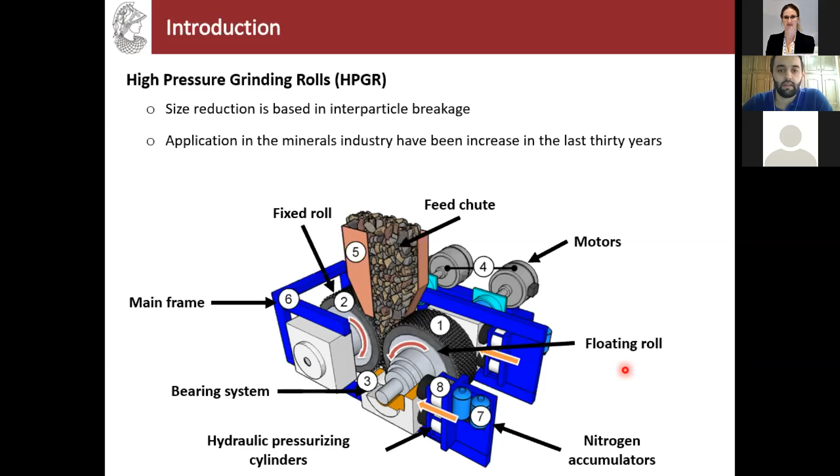For instance, the HPGR has high throughput, allows lower specific energy consumption, and also a high reduction ratio. Therefore, in the last 3 decades, applications of the HPGR in the minerals industry have grown. Among these different applications, one that started in the middle of the 1990s was the incorporation of the HPGR inside pelletizing plants.

Here in Brazil, the company Vale was one of the pioneers applying the HPGR inside an important step within the iron ore pelletizing process - what they call the pellet feed preparation step. This step is quite important in pelletizing plants to improve the specific surface area of the iron ore concentrate, thus providing a more qualified product to the downstream operation. The HPGR can operate in an integrated circuit with ball milling, being applied even in the pre-grinding and also in the regrinding pre-pelletizing process.

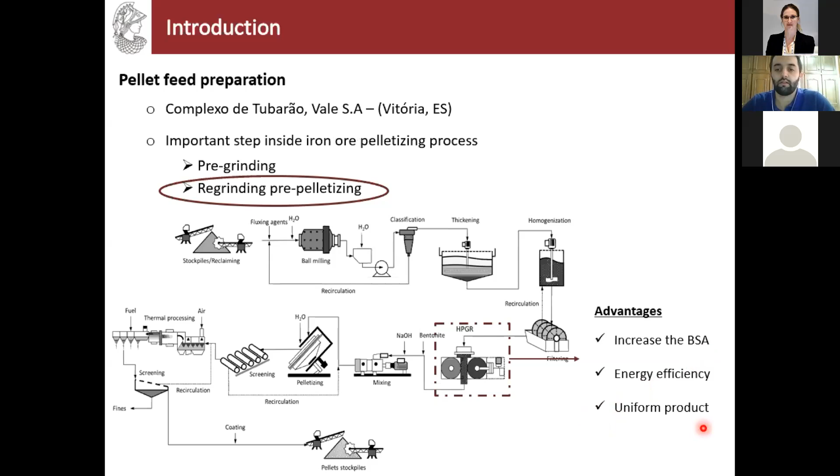The application of the HPGR here has some advantages—for instance, improvement in the BSA, the specific surface area of the iron ore concentrate, in a process with high energy efficiency, also producing a very uniform product. Taking into account all of these advantages, in the last 3 years, in a great partnership with the company Vale, we have tried to understand and study the HPGR iron ore pellet feed from different points of view.

We've tried to understand how different operating conditions can change the HPGR performance, also how the particle breakage behavior for different iron ore concentrates used to feed the HPGR can change the size reduction, and of course trying to apply HPGR mathematical modeling to describe the HPGR performance from variations in the feed characteristics and also in the operating conditions.

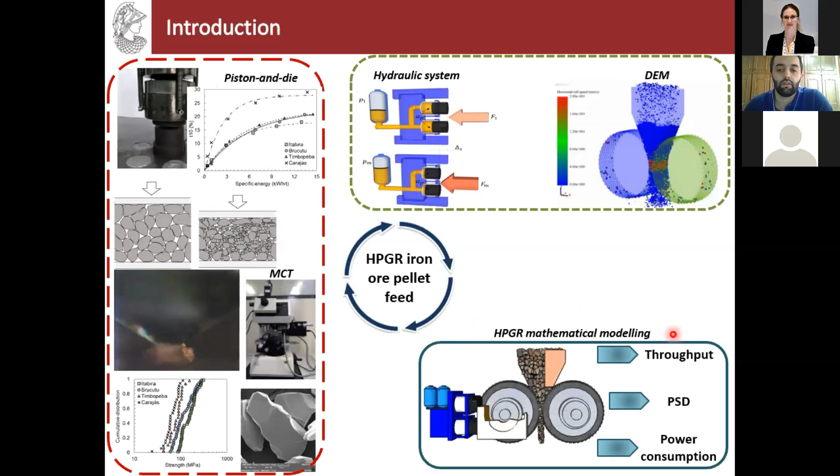Today I'm going to talk about the work we carried out regarding the application of HPGR mathematical modeling for pressing iron ore concentrates.

Among different models already proposed in the literature, these three presented here can be stated as the most popular models available. Basically these three phenomenological approaches rely on the correlation between the material variables, the feed characteristics, or key variables, the operating conditions, and also the machine settings, to predict the HPGR performance from three different performance variables: the throughput, the power consumption, and also the product size distribution.

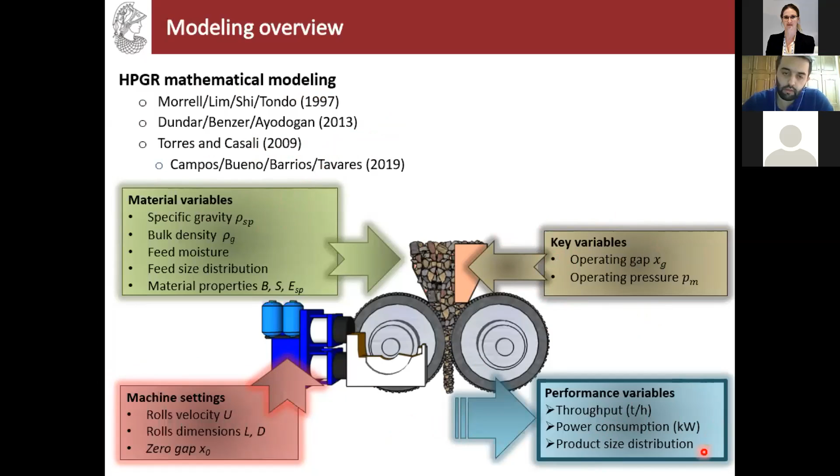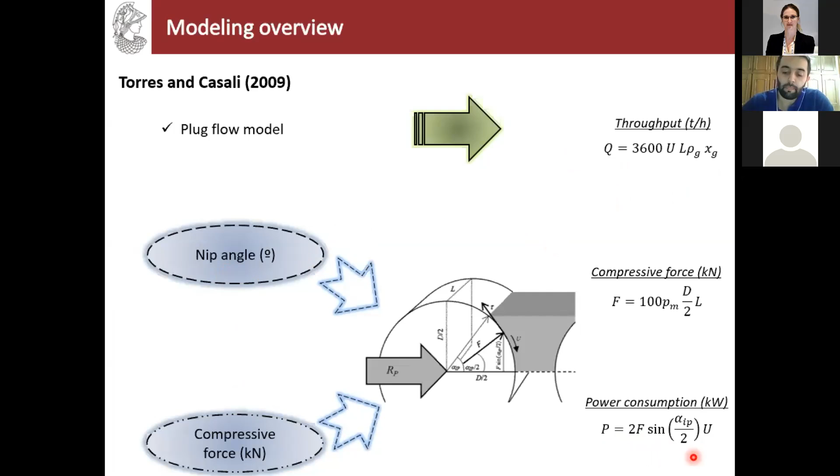Among these three models, the one proposed in 2009 by Torres and Casali relies on the plug flow model to describe the throughput using this equation presented above, and also relies on a correlation between the calculated nip angle and the compressive force applied to the particle bed to describe the power consumption using the equation presented below. Finally, the particle breakage model proposed by Torres and Casali relies on a description based on the population balance model to describe the size reduction.

Here the authors proposed to divide the roll into different sections along the axial position, thus proposing a parabolic power profile along the roll length. This parabolic power profile can be defined by this equation presented here, thus providing us different breakage rates along the roll length.

Among all the models already used and available in the literature, the Torres and Casali model is the only one that allowed describing the size reduction at different positions along the roll length, thus providing us a finer product size distribution at the central region and also a coarser product size distribution at the edge region.

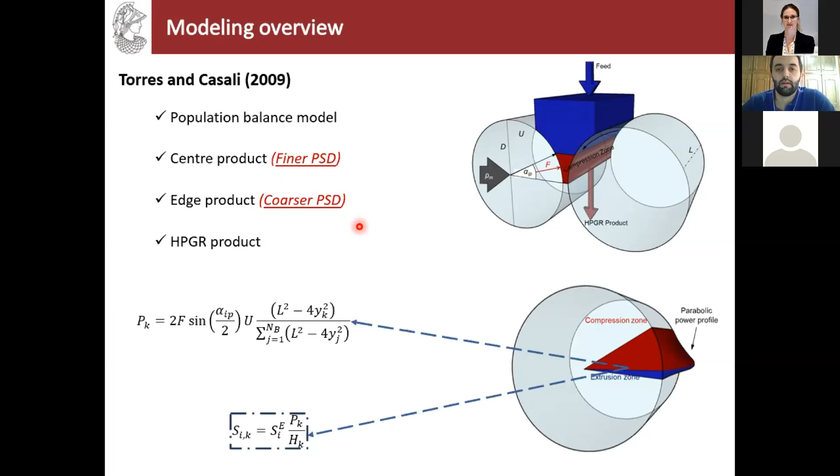However, even though the Torres and Casali model has been used by different authors for copper ore operation and also applied as a model predictive control, there are some limitations and challenges regarding its application for pressing iron ore concentrates, as you can see here.

We have seen that the feed material ejected by the edge of the roll and the material acceleration in the compression zone are two challenges not accounted for by the throughput model. Indeed, these limitations compromise the prediction of this performance variable.

The comparison between experimental and calculated values has shown that the model underestimates the experimental measurements for both pilot scale and some industrial scale HPGRs, in a wide operating range. So indeed, this model is not a very good tool to describe the throughput for pressing iron ore concentrates.

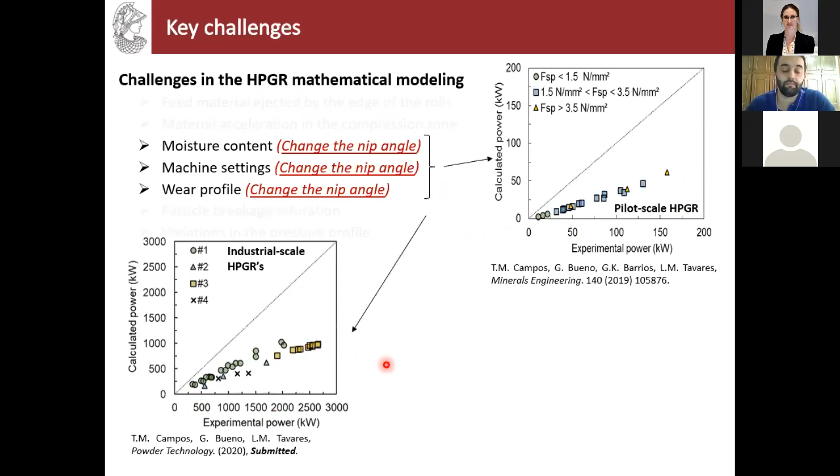Finally, the limitations for the particle breakage model. The first one is the most important limitation for different HPGR models, and here it's important to bear in mind that there is no model in the literature that allows describing the particle breakage saturation effect.

The Torres and Casali model indeed overestimates the size reduction for iron ore concentrates when the HPGR is operating with high compressive force—in other words, high specific energy consumption. There is an additional limitation for the Torres and Casali model regarding the variation in the pressure profile.

As you can see, the Torres and Casali model relies on a constant shape profile, a parabolic profile, this red line presented here. But for industrial scale HPGRs, we have seen that a more trapezoidal profile is the more proper description along the actual position instead of a parabolic profile, highlighting that this model has some limitations to describe the particle breakage behavior for pressing iron ore concentrates.

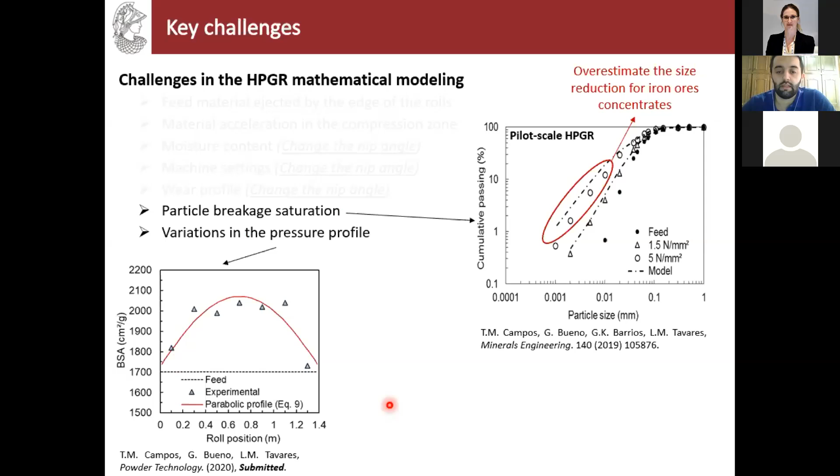Taking into account all of these limitations, in the last 3 years we tried to improve the model prediction, basically using the main structure already proposed by the Torres and Casali model, but including some modifications that we have tried to use.

The first one, regarding the throughput model, this equation should be able to calculate the feed material ejected by the edge of the roll, the proportion of material that will be ejected by the edge of the roll, as you can see in the figure, according to different operating conditions.

The second modification relies on the proper description of the material acceleration in the compression zone. This equation should be able to calculate the material speed according to some variations in the operating conditions.

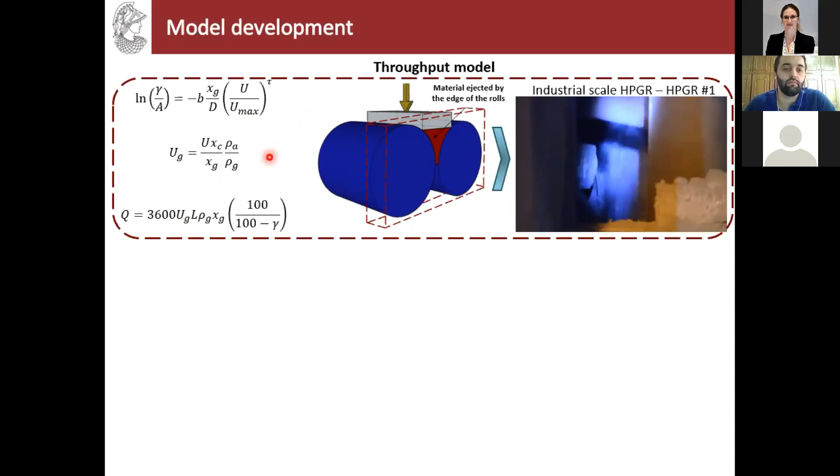And the last modification, applying the new equation for the plug flow model, but here accounting for the two modifications that we proposed. For the power consumption model, we also proposed some modifications, just a single fitting parameter in order to increase the calculated NIP angle.

This is trying to account for the different challenges that I presented before, and also trying to provide a more reliable description for the power consumption.

And the last modifications proposed for the particle breakage model involve 3 main modifications. The first one relies on the incorporation of the normalized breakage function in order to describe the particle breakage behavior for Brazilian iron ores, in order to control the ultrafine particle generation.

The second one relies on the incorporation of the breakage saturation effect, trying to apply this efficiency term here that will be able to change according to the application of the specific energy.

And finally, a more general equation that should be able to describe the actual roll profile. This equation is based on the Fourier transform, and this single fitting parameter presented here should be able to change the shape profile from a more parabolic profile to a more trapezoidal profile.

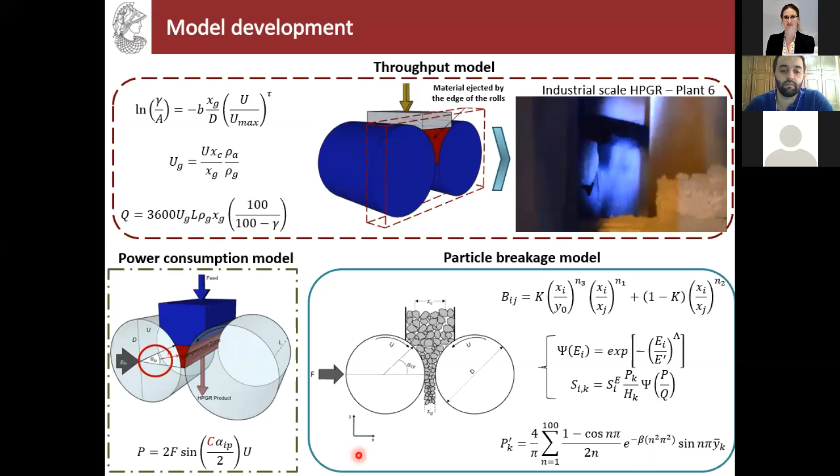Taking into account all of the advantages and modifications that we presented for this model, we tried to validate the model at different scales of operation.

Here, first, the comparison between experimental and calculated values for the throughput in some industrial scale HPGRs. As you can see, a very good agreement between experimental and calculated values for different equipment in a wide operating range, highlighting that we have here a very good model with great fidelity to describe this performance variable in industrial scale operations.

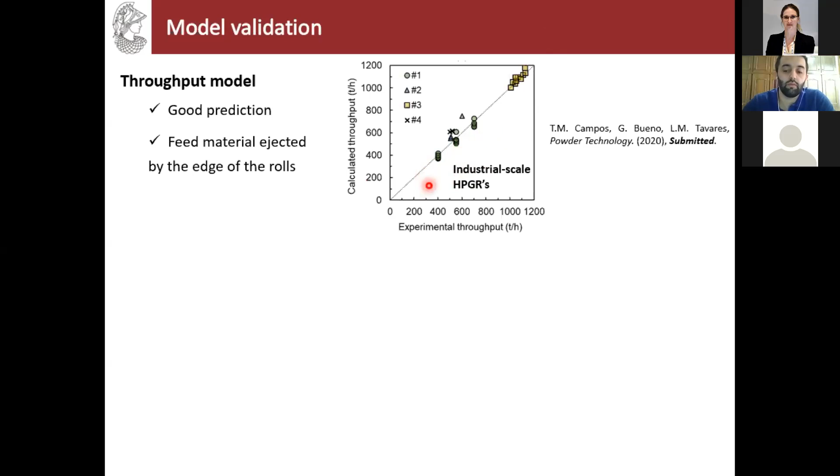We also validated this model for a pilot scale HPGR in a wide operating range here, highlighting that the model indeed has a very good agreement between experimental and calculated measurements.

And also for a lab scale HPGR, a very good description for different tests that we carried out, highlighting that this model is a very good tool to describe the throughput at different scales of operation, accounting for the modifications that we proposed.

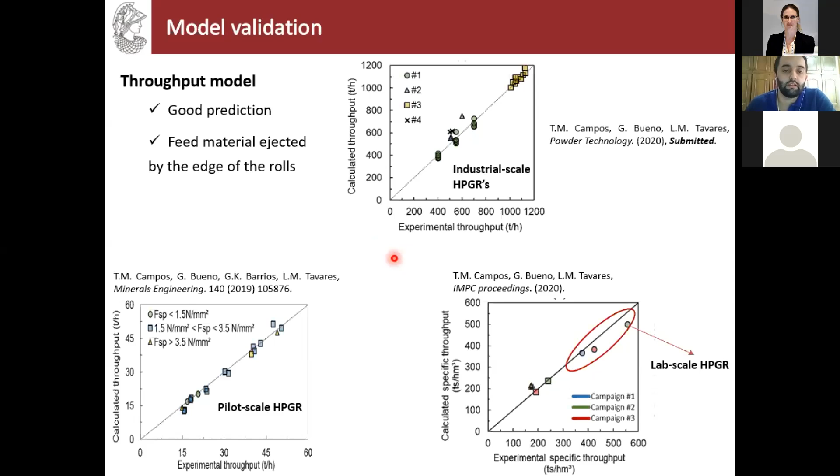For the power consumption model, we also validated the model, here for a wide operating range for different equipment in industrial scale HPGR. Once again, we have shown that the model is indeed a very good tool to describe the power consumption.

Here it is important to bear in mind that just a single fitting parameter was quite important to improve the model prediction. So in an industrial scale HPGR, a very good agreement.

Also in the pilot scale HPGR, for a wide operating range, a very good agreement for calculating the experimental values. And finally for a lab scale HPGR.

Once again, the single fitting parameter used was quite important to improve the model prediction, highlighting the very good agreement between experimental and calculated values for different scales of operation.

It is important to bear in mind that the fitted parameter for each HPGR used was very close to each other, despite using different equipment to estimate the parameter.

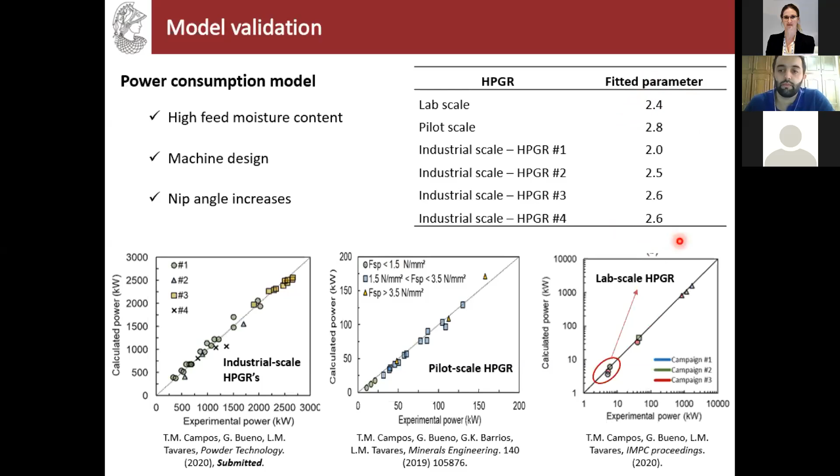For the particle breakage model, it's first important to estimate the optimal parameters that describe the particle breakage behavior. Using this base case, we compare experimental and fitted values and find very good agreement between both, highlighting the optimal parameters that describe the normalized breakage function for different top size particles.

We used a constant breakage function and fitted different selection functions, specific for different equipment in industrial scale.

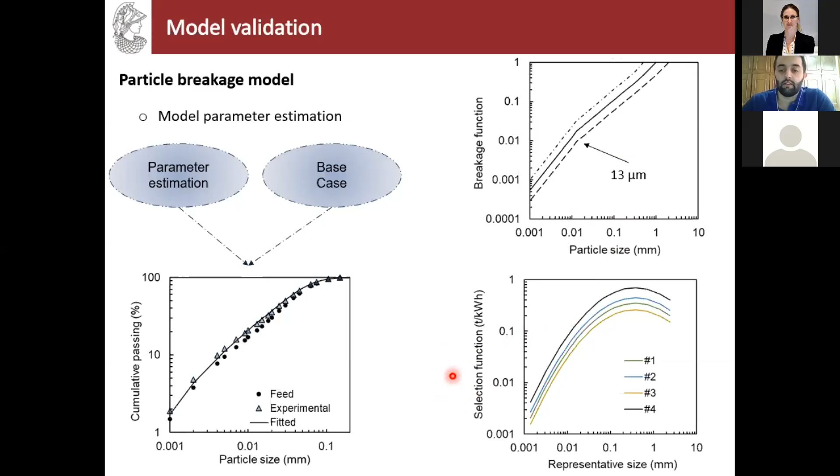First, for validation, the prediction of the product BSA for a pilot scale HPGR: the single incorporation of the non-normalized breakage function for pressing iron ore concentrates in a pilot scale HPGR was quite important to improve the model prediction.

Here on the right, the modified Torres and Casali model shows a very good description of the product BSA in a wide operating range, highlighting that we have a very good model with great fidelity to describe this operation.

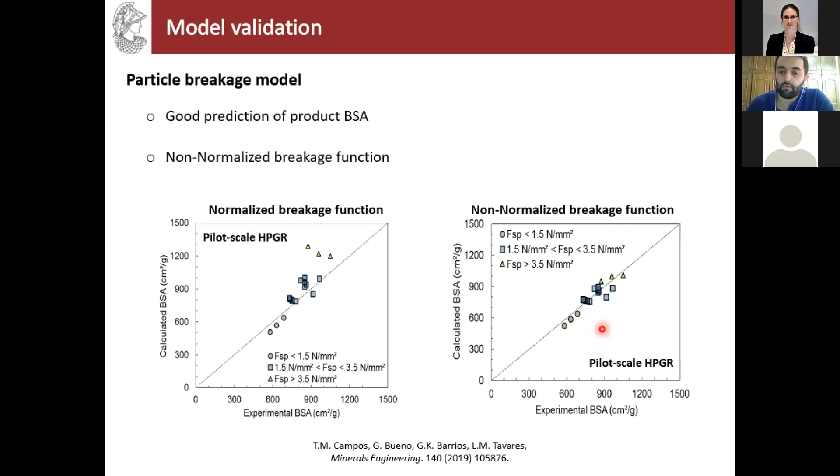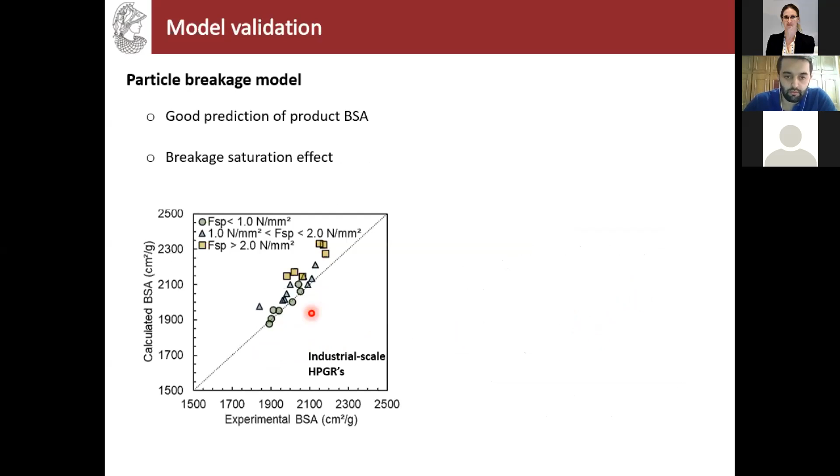For industrial scale HPGRs, the application of the modified Torres and Casali model with the non-normalized breakage function shown had great potential to describe the product BSA, but it's important to highlight this test was carried out with high specific compressive forces.

Indeed, the Torres and Casali model does not provide a very good description, since it lacks proper description of the breakage saturation effect. Accounting for the modifications we proposed, once again the comparison between calculated and experimental values shows a more proper description of the size reduction.

This highlights a wide operating range for different equipment, with very good agreement between experimental and calculated values, showing that we have here a very good model with great fidelity to describe this size reduction for industrial scale HPGRs.

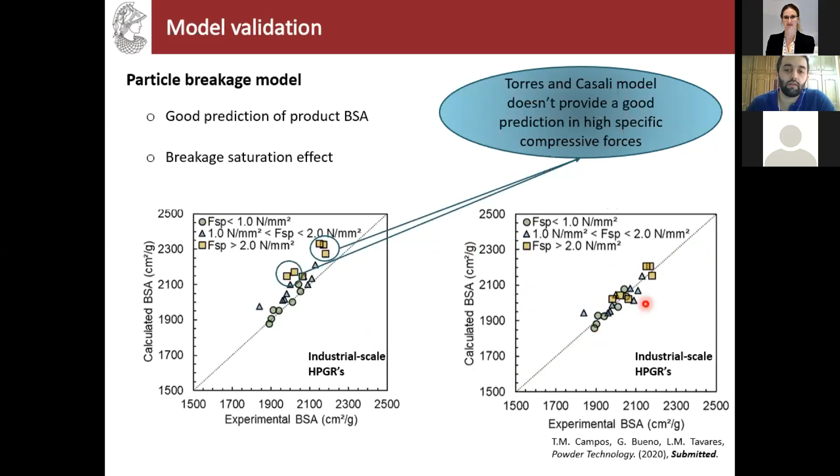The modified Torres and Casali model was also validated to predict different shape profiles along the axial position. This equation, with our modification, presents a single fitting parameter that should be able to change the shape profile from a more parabolic profile to a more trapezoidal profile.

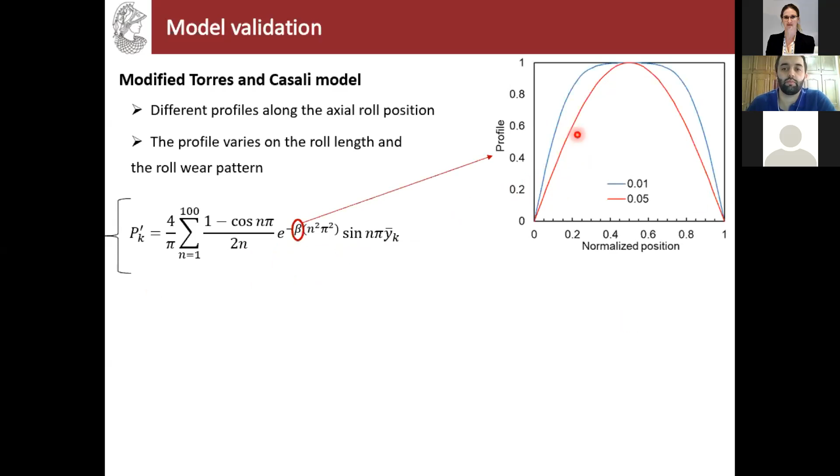So indeed, after all the model validation, we have here a very good, robust and practical model that can be used to describe the pressing of iron ore concentrate for different scales of operation.

Now, to present some results regarding industrial case studies, I will present two case studies. The first one concerns the application for a pelletizing plant from Vale.

The HPGR equipment used by the company Vale is quite impressive, with high roll dimensions. There is a great problem in the operation: the feeder does not ensure a choke fed condition during grinding, and therefore the real throughput of the HPGR is lower than the projected throughput.

So we proposed to the Vale team to apply a different circuit configuration: a single stage pressing with recycle, applying product edge recycle, improving the mass of material inside the HPGR, and maybe providing a more qualified product at the end of the operation.

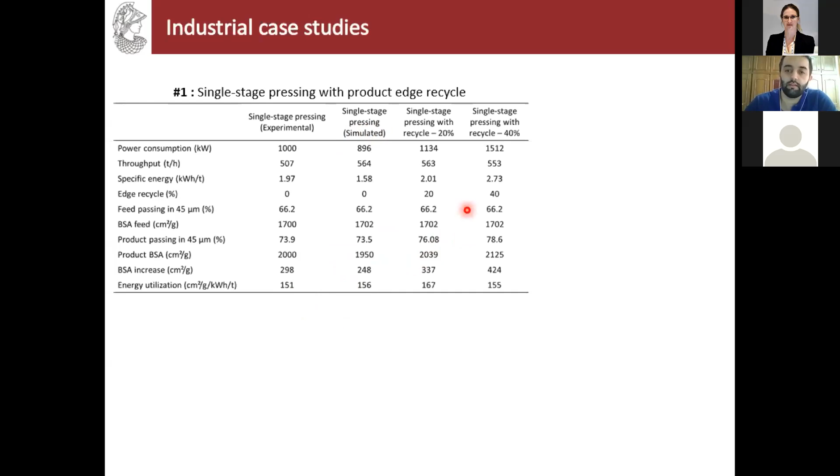Here, presenting the different scenarios we simulated, I will highlight the single stage pressing with 40% of product edge recycle.

It's important to highlight that the circuit throughput was kept constant, but the specific energy was a little bit higher than the traditional single stage pressing operation.

But most importantly, the product BSA we achieved was around 424 centimeters square per gram, an increase from the feed in comparison to the single stage pressing's 248 centimeters square per gram.

So indeed, we have here a very good circuit configuration that allows us to improve the Blaine specific surface area of the product, improve the qualification of the final product, and also increase the mass of material processed by the HPGR.

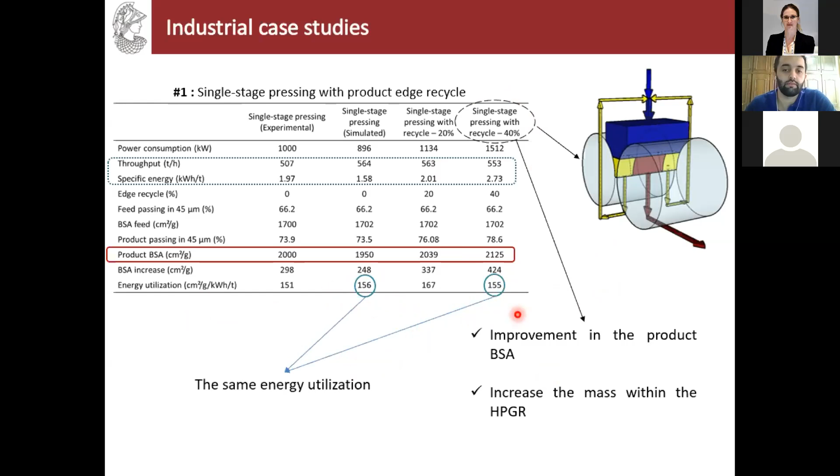It's also important to highlight that the energy utilization used by both equipment configurations was the same, regarding the single stage pressing and the single stage pressing with recycle, highlighting that there is great potential to apply the circuit configuration using product edge recycle for pressing iron ore concentrates.

The second case study relies on the application of the model as a pseudo-dynamic model.

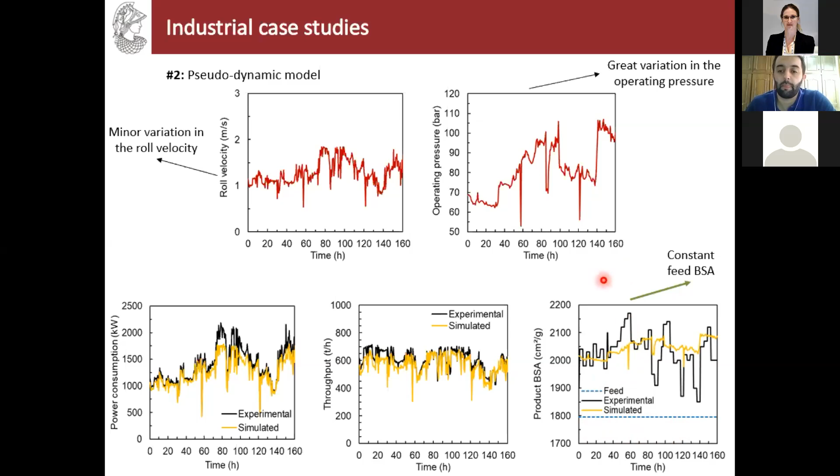So the conclusions of my work: indeed, the modifications that we proposed were quite important to improve the throughput and power consumption prediction, and also the particle breakage model was validated in a wide operating range.

The new equation was important to improve the description of the power profile, and also the model was applied using two industrial case studies, highlighting that the model can be used to simulate different circuit configurations and improve operation, and also to be applied as a pseudo-dynamic model, maybe to improve the digitalization of the operation.

And here the model shows great potential to describe some industrial scale HPGR operation, and also some pilot scale and lab scale HPGR operation for pressing iron ore concentrates.

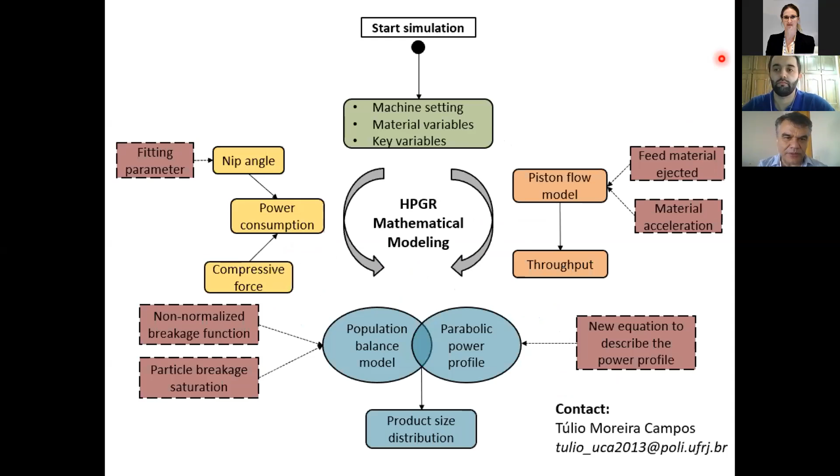Just out of curiosity, in the first case study you showed a picture of an HPGR by ThyssenKrupp. A lot of you may know this was the first attempt to use the HPGR in the hard rock minerals industry. That's exactly the same machine that was tried in 1995 in Cyprus Sierrita in Arizona, US, which was not a successful application of the HPGR at the time. This HPGR was pretty much decommissioned from that site, and then Vale ended up buying it, and until today it's pressing iron ore fines, just out of curiosity.

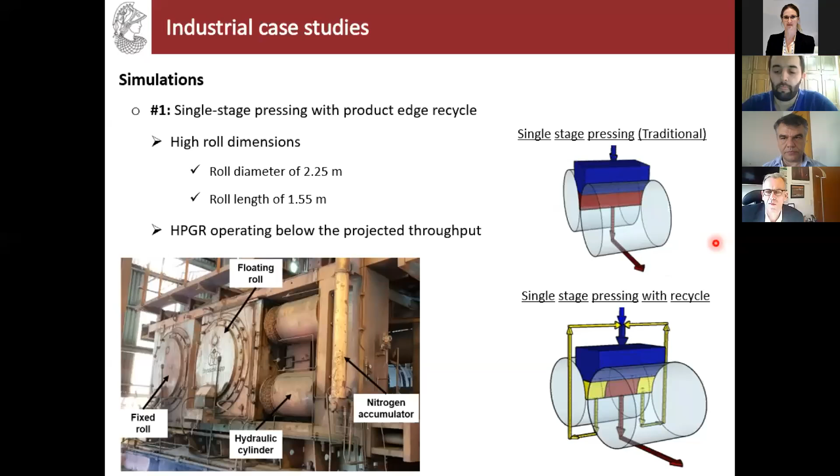Okay, I'm sorry, Professor, could you please just repeat the question? I think there's a problem with the audio here. Maybe more briefly, Tulio, what is your opinion about different alternatives to cheek plates, like flanges and things like that, and how could the model cope with that?

Yes, indeed, cheek plates and flanged rolls are the two main technologies used as side seals for the HPGR. I imagine the flanged rolls could provide a more homogeneous pressure profile along the axial roll position. Cheek plates are a very good side seal, but there is indeed a great distinction between the pressure in the central region and in the edge region.

And I imagine that the flanged rolls can provide a more homogeneous pressure profile along the axial position. There are some other features in the HPGR operation, such as moisture content. We have seen that in a pilot scale HPGR, the feed moisture can also improve the pressure profile, providing a more homogeneous pressure profile along the roll length instead of this edge effect presented here.

Yeah, just complementing, a colleague of Tulio's is actually doing work simulating in DEM in order to capture this profile. So we're using DEM to capture the power or pressure profile, which, as Tulio mentioned, is very much affected by the type of containment system that you have. Indeed, that's something on the way. Maybe next year, hopefully, we'll have an update on that.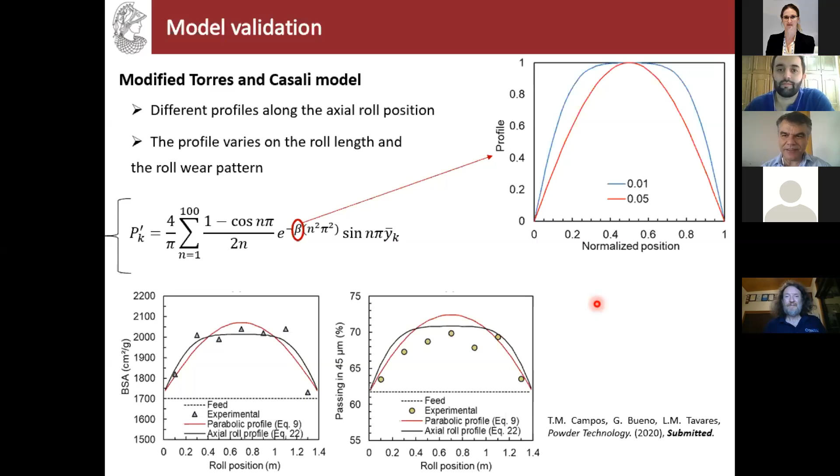Shujaat demonstrated early determination by taking two years to get himself from applying to join a PhD with me to eventually getting through the door. It was at least two years through the university and Australian system. He's from Pakistan. He won the gold medal for his degree in mineral processing over the four years, and then he was awarded an EMerald Scholarship to go and study a master's in geosciences at University of Liège, Nancy, Luleå. He also went to Freiberg, I wasn't sure if that was part of the degree, but across four universities. So he really got a good view of the European university scene before coming to join me and get promoted to making small rocks even smaller in a most precise manner, which he can share with you tonight. So Shujaat, over to you.

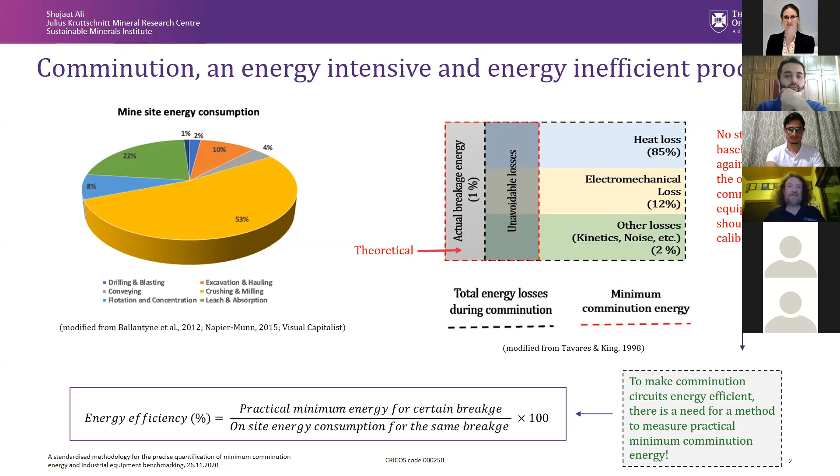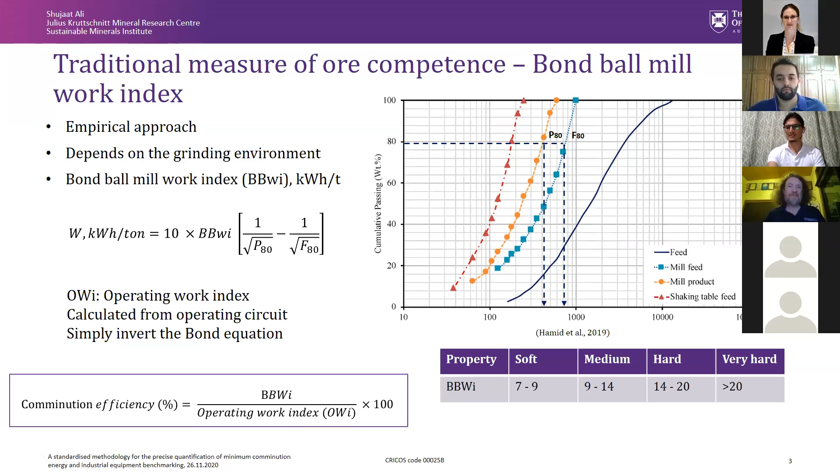If not, then it will give you misleading results. Considering that, Professor Malcolm Powell here at JKMRC coined the term size specific energy, which he defines as the energy consumed to generate a material below a marker size, such as 75 micron.

It is considered a more consistent hardness index as opposed to other indices such as bond work index, and after all, it is independent of grinding environment, unlike bond work index.

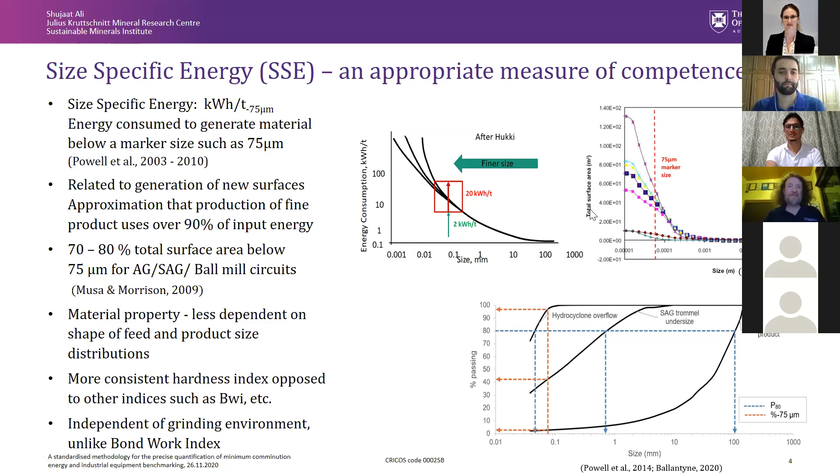We have a lot of breakage tests today. They are classified as either bankable tests, geometallurgical tests, or proxy tests. If they're bankable, they could be like bond test, JK drop weight test, SMC test, similarly geomet test. I will not go into detail of these tests.

However, I would highlight that they could be either bulk grindability tests or single particle breakage tests. Bulk grindability tests are not really well appreciated for characterization, because they don't give you the right measure of the minimum practical comminution energy, due to interparticle interactions. There is also a complexity of multiple breakage modes involved, such as compression, impact, and attrition altogether, and it also depends on the grinding environment.

On the other hand, single particle breakage - a lot of studies since the 1960s until now show that it is a very accurate, or quite appropriate way, of establishing a relationship between input mechanical energy and size reduction. For instance, JK drop weight test was one of them, and also impact load cell, which has its own variants, such as SILC.

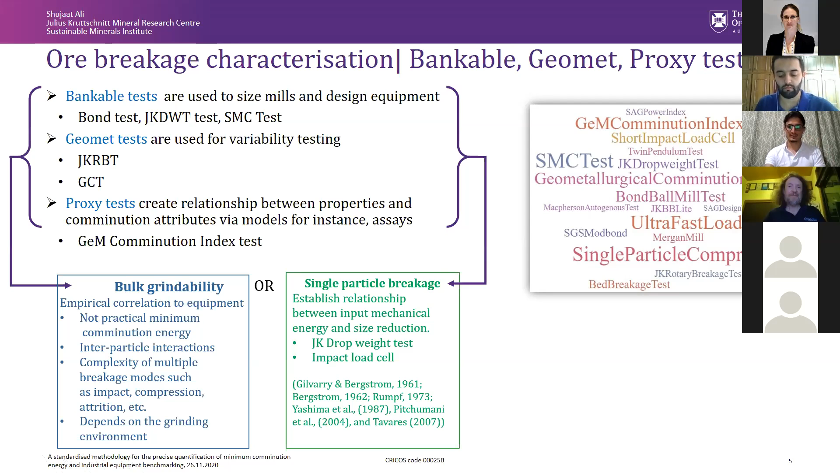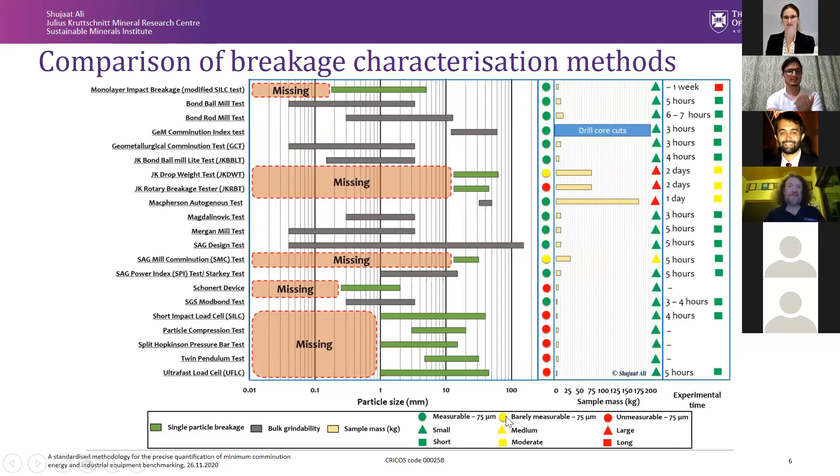So I have put together here a summary of all the different characterization techniques, which elucidates the comparison between them in terms of the particle size range where each operates, their capability to produce enough minus 75 micron material for determination of size specific energy, the initial mass required for the test, and the time of the test. I'm comparing all these techniques using a traffic light system: green means highly acceptable, red means not desirable, and yellow means acceptable or not depending on your needs.

That was just a comparative analysis. I will be more focused on single particle breakage techniques, and I will come to the first one at the end. Before that, I will start from the JK drop weight test and the JK rotary breakage tester. Let's see the particle size range where they operate.

Below around 12 millimeters, these techniques don't operate, but most of the energy is considered to be consumed in this area. So it's missing here, and there's also a lot of initial sample mass required for the test. So it's not very appropriate for either of these tests to use.

Similarly, the SAG mill test is again missing in the fine range, and the initial sample mass required isn't very small either. If we go to the Schonert device, it doesn't have the capability to produce minus 75 micron, and likewise for the short impact load cell, particle compression test, and so on—none of them produce any minus 75 micron.

However, the monolayer impact breakage test, which was basically a modified SILC test performed by a student of Grant here at JKMRC a couple of years back, seems quite promising because it went all the way down to around 180 micron. It was also able to collect a sufficient amount of minus 75 micron, as you see from the green signal, but it was very time consuming—around one week was required for that—and there are complexities involved with the experimental procedure.

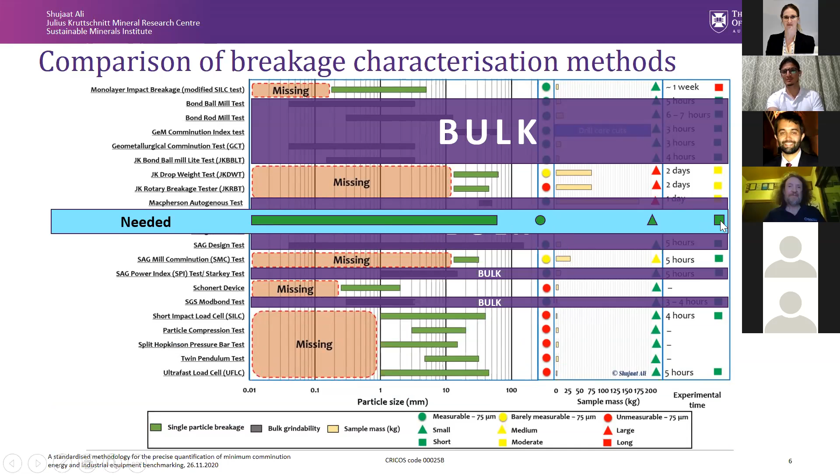So putting it all together, what we actually needed was a method that can cover a wide range of particle sizes, that could give us sufficient minus 75 micron material produced, that consumes very little mass, and that is simple and quick. That lays down my research motivation.

There's always a sort of uncertainty associated with these results, and if you extrapolate, that uncertainty will keep increasing further. So we need a technique that can give us data in this missing range. Once we know that, we'll be able to compare or calibrate our industrial or lab scale equipment with that minimum comminution energy.

So we need a single particle breakage test that can determine practical minimum comminution energy in terms of size specific energy, with testing capability at a fine size range down to 100 micrometers. If we're generating this data, we need to grind very fine, down to 100 micron, and calibrate on-site comminution equipment.

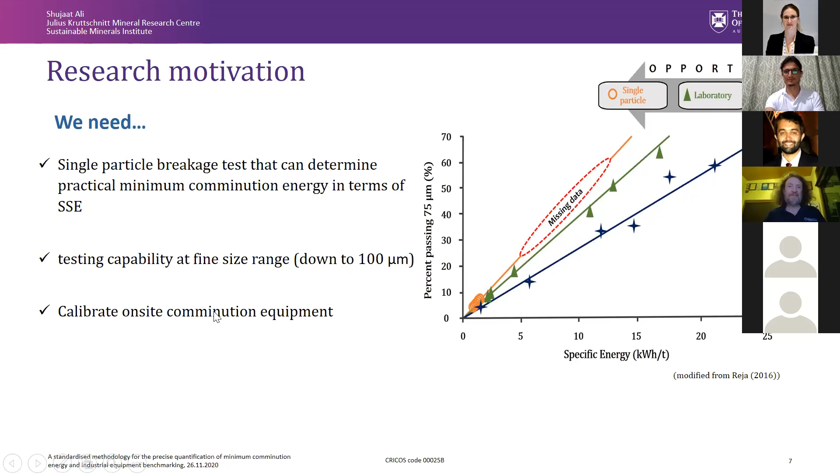Secondly, size-specific energy determined through particle monolayer breakage can be used as a reliable measure of minimum achievable comminution energy. And third, a precision rolls crusher can be used as a practical characterization device to accurately measure the minimum achievable comminution energy across a wide range of initial particle sizes using particle monolayer breakage.

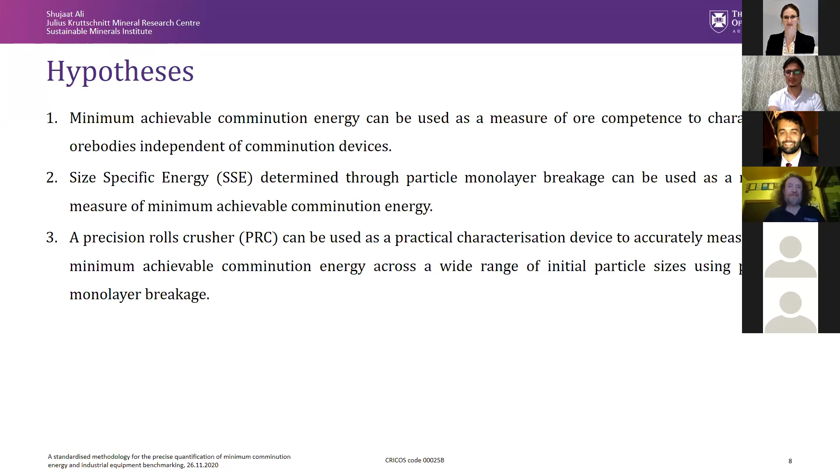The objectives of my thesis are to measure size-specific energy up to 80% passing minus 75 micrometer.

The second objective is to validate the precision rolls crusher size-specific energy results. How will we validate that? By testing the same samples other researchers used for monolayer impact breakage and single particle breakage tests, such as Reja, the grad student, and Fatma Saeidi. They already have their samples here with us, and we will compare our results with theirs.

Third, compare measured size-specific energy to that calculated from high quality production plant surveys. These are basically the survey data, and we have samples from the surveys, so the results made using the rolls crusher will be compared with them afterward.

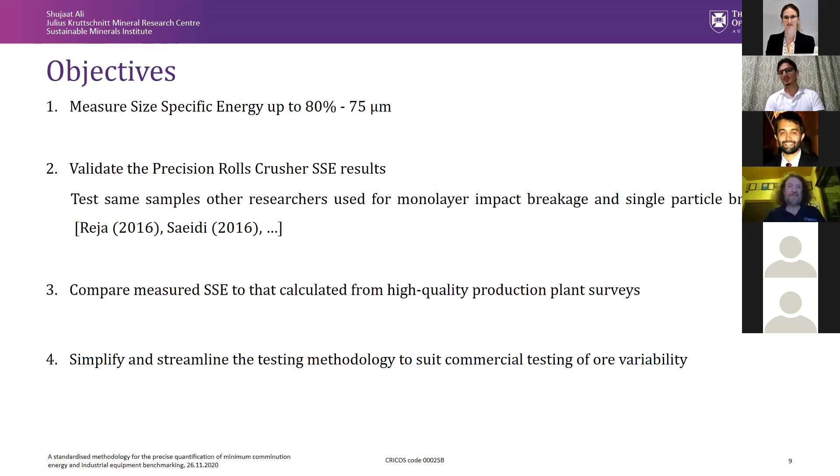And fourth, simplify and streamline the testing methodology to suit commercial testing of ore variability. So the last step of the thesis would be to simplify the methodology so that it is well suited for commercial testing. What is the precision rolls crusher?

So here is a sneak peek of that. It is a device that is here at JKMRC since 2017, I believe. Here you see we have a digital feeder, and we can adjust the gap of the digital feeder.

This allows a monolayer of feed to leave the feeder. Then we have a chute that drops right in the middle of counter-rotating rolls driven by two motors, and right in between the two motors are highly precise torque sensors that are more obvious in the side view of this picture.

Once the material passes through, it is broken and collected at the collecting pan, and we have an embedded 75 micron sieve. Everything that flows off inside the chamber of the crusher is screened out. Everything less than minus 75 micron is collected by a domestic Dyson cleaner, since we do not want any minus 75 micron material lost. We are interested in real and accurate collection of minus 75 micron.

The rolls have a diameter of 250 millimeters and a width of 100 millimeters. It's an open system, so we can see through it, and it's tangible. This is a bit of the schematic diagram of the precision rolls crusher.

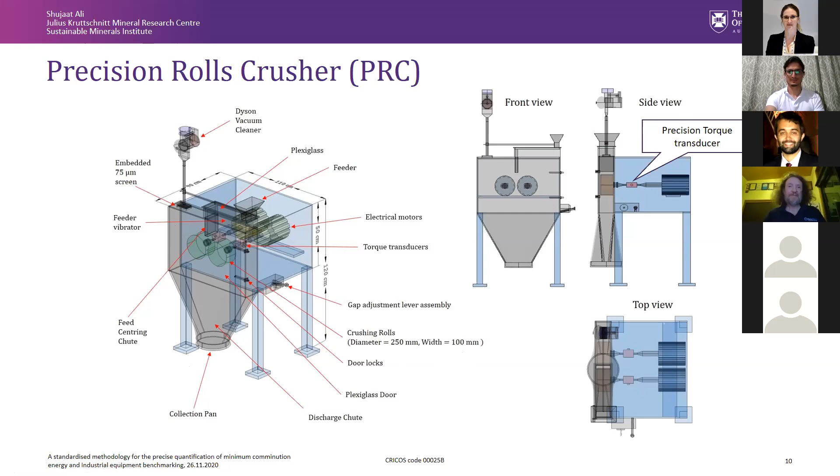As I said, we are interested in minimum breakage energy determination. So the approach we use is progressive breakage, so that we can measure the primary breakage energy, like the minimum fracture energy, that you see inside that dotted box.

What we do first is set a gap equivalent to the size of the particle, and we break the monolayer of those particles, around 300 grams of mass approximately. Then we collect the product and recycle it through pass two, further reducing the gap. The reduction ratio between the particle size and the gap is kept at a minimum, so that it doesn't either overcrush or under-chip the particles.

For now we have done some test work using a 0.85 reduction ratio between initial particle size and the gap. So we keep reducing the gap progressively and recycle the material. Every third pass, though it could be every fourth pass or every pass, we recycle the material again, and every third pass we measure the product's size distribution and remove the minus 75 micron material, then the rest of the product is recycled again.

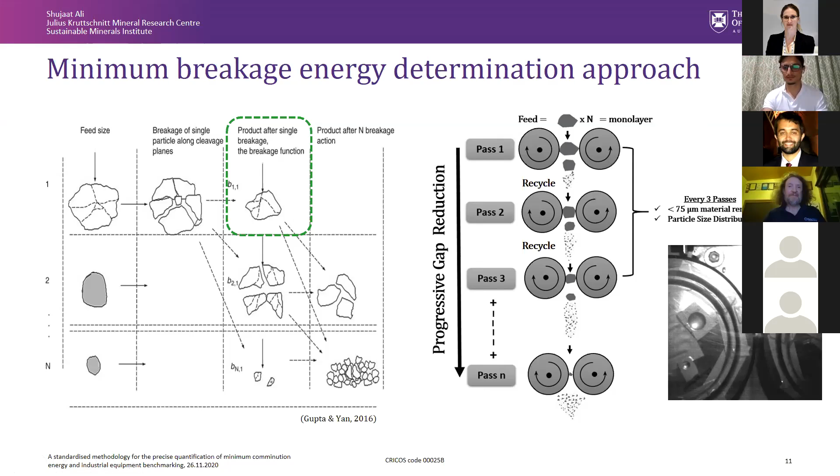Now, calculation of breakage energy. Here is the energy equation. Since we have highly sensitive torque transducers, they give us data on speed in RPM and roll torque in Newton meters. We then convert that angular speed and torque into energy using this equation, as shown in the figures.

So what we do basically, we run the equipment at no load for a while, and then we pour in the feed, so that we call it a breakage event. You see here the torque is changing, and then again we leave it running for a while at no load.

And then we convert that data into energy using this equation here. So energy is here, but the beauty is that you see very noisy data, but when you accumulate that data, you see the energy, and when you normalize it, you have a no load starting at zero energy, and then it keeps increasing during the breakage event.

And again once the breakage is finished, it becomes constant. Also we have from the manufacturer the electrical energy measurement system installed inside, but we do not take that into consideration, because motor power isn't used due to substantial losses and inefficiency of low speed and torque.

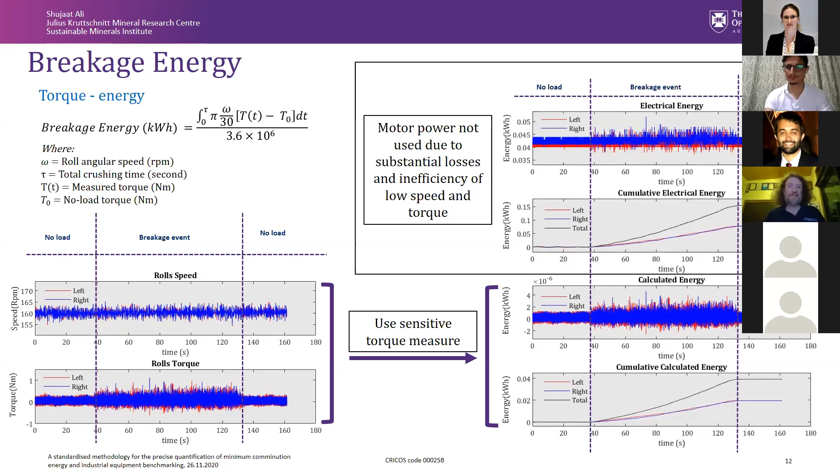Here are some results. As I said, we have done a bit of work on a couple of ores here, and I'm showing you the results we got. We went down to 500 micrometer, or 0.5 millimeter gap, in the earlier studies, and we tested 3 different sizes: one is 1.4, the second top size is 2.8, and the third was the natural PSD of the ore. If we plot specific energy versus percent passing 75 micron, we see a very linear relationship for both the 1.4 millimeter and 2.8 sizes.

However, if we go for the natural PSD, you see in the beginning it's a bit kinky, but after a while it starts going straight.

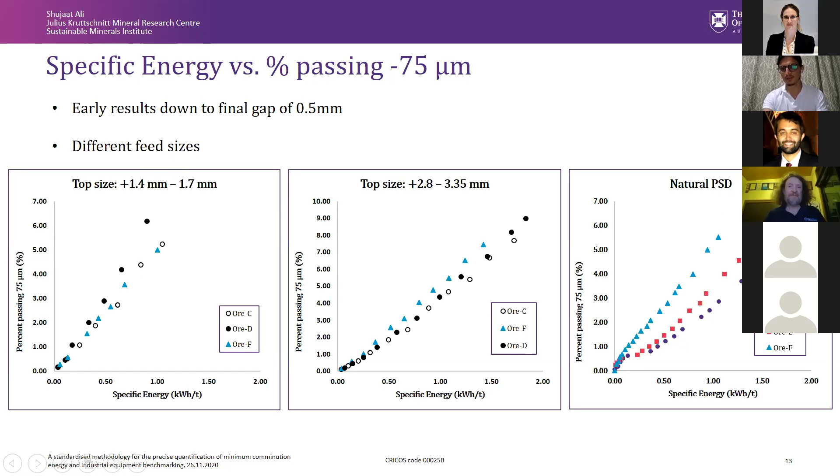And if we plot specific energy versus gap width for the same sizes, we see that if we decrease the gap width, as expected the specific energy will increase, as you see here, and vice versa. The reason for trying different feeds was to investigate the influence of feed size distribution on specific energy, again for 1.4 top size, 2.8, and natural PSD.

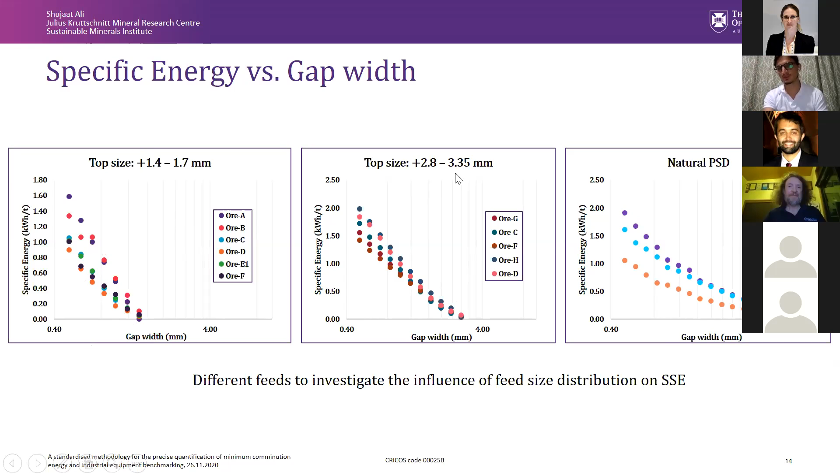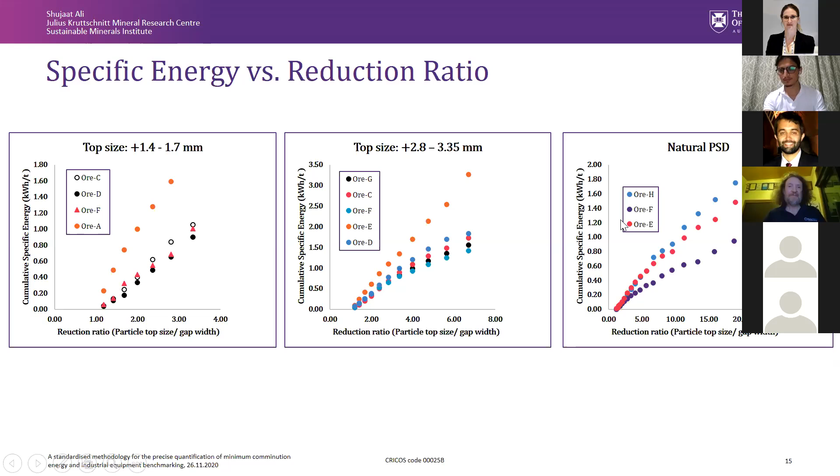So contribution to knowledge is: it can provide a precise and practical measure of minimum comminution energy at fine sizes down to 100 micrometer, which hasn't been done by any existing technique as of now. This methodology also has potential as a baseline for the determination of comminution equipment operating efficiency.

And also, comminution models require ore characterization spanning the full feed and content of size distribution. When we look at existing breakage models, we see that extrapolation to fine sizes is highly inaccurate, and it underestimates the energy consumption, because the majority of the energy is consumed in grinding the fine sizes. So we really need a method to fill the gap and get the right energy number at that fine size range.

So yeah, that is it. Thank you very much for your attention.

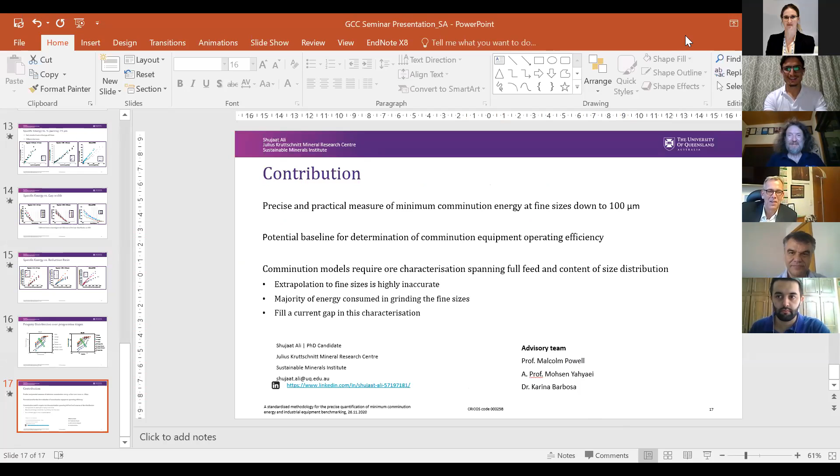Yeah, Shujaat, perhaps I could ask you the first tough question. You always speak about the minimum comminution energy, but you only use compression. So how come you conclude that compression gives you the minimum comminution energy? Why not shear? If you would change the speed, if you would come to the differential speed of your rollers, I could imagine you'd get completely different results for certain ores at least.

So the thing is, during the scoping studies, I would be finding that appropriate speed so that I don't find any sort of slip between the particle falling in the middle of the rolls. There shouldn't be any momentary slip. So the speed of the rolls should actually match the speed of the falling particle. I still need to investigate what is the appropriate speed to adjust to ensure the condition of minimum breakage.

I'm not focusing on this initial slippage, which you can never completely avoid with the setup, but I'm really thinking about shear load. You speak about stipulating your results as a minimum comminution energy. Yes, but this is only applicable for your specific setup, because it's the minimum comminution energy for compressive load. If you had impact load, if you had shear load, you would probably come to completely different results.